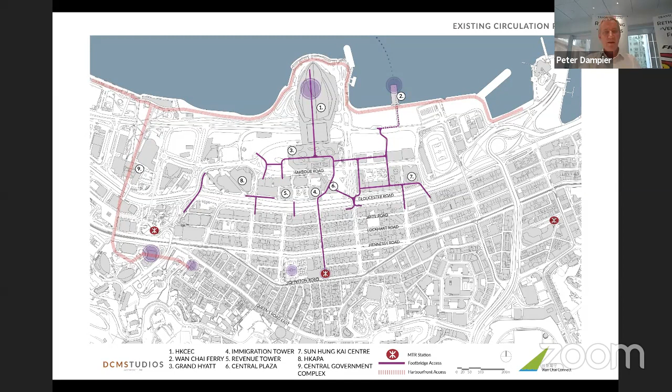No, you don't want that. That's the sort of approach at the moment. If you're trying to get from Wan Chai Ferry to Pacific Place, it's a bit of a nightmare. So the opportunity was the idea, by looking along Gloucester Road, of putting a platform across the top and linking them up.

But the real catalyst for this was the announcement from the government that they were going to sell the Immigration Tower, Wan Chai Tower and the Revenue Tower site. That's front and centre to the problem of Wan Chai.

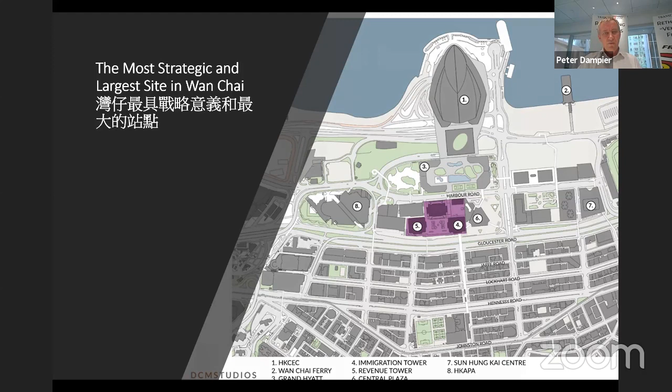Therefore we wanted to get in front of this development and spark some debate and give people something to think about, not unlike a similar thing we did with Site 3 with Benoy, which the government has taken on board, and that's going to be a design and price sale.

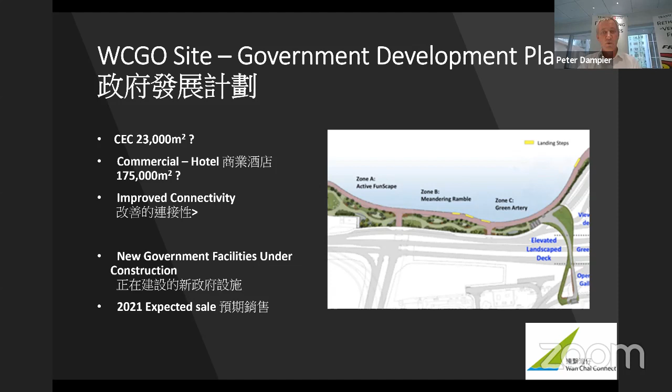So moving on, the government have basically intimated there'll be a new extension to the conference centre, a hotel, improved connectivity, but they haven't said what. They have actually mentioned recently about linking a bridge to the harbour, which is piecemeal because it only links the Hyatt Garden to the waterfront. It doesn't deal with the major problem, which is Gloucester Road.

Government policy is about livability, people-centric, better public spaces, walkability. So we felt we were on the right track. The real opportunity is the future of Wan Chai. It's very well known, Jan Gehl's statement about first life, then spaces, etc. Getting that right is in principle why we started this long before.

So actually it's looking at desire lines. It's an elevated approach that deals with the problem that, let's face it, they're not going to take the barriers down. You're not going to have pedestrianisation. They've been trying in Des Voeux Road for 17 years.

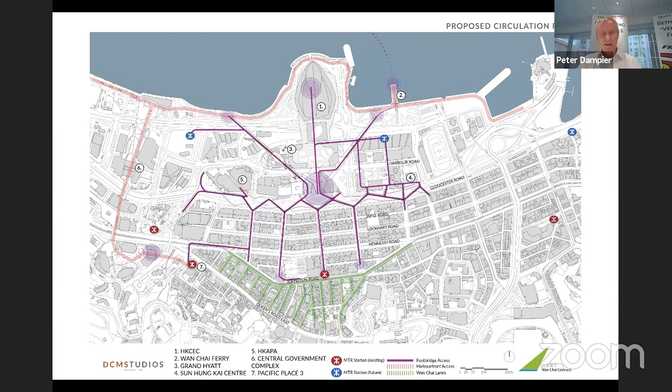So the only way to deal with this is to actually take it at face value and create something unique that floats above and provides that connectivity, linking the MTR stations, the new MTR stations, and the desire lines to the harbour.

So in essence, you've got 4 spikes coming back into Wan Chai to sort of Johnston Road. You've got a linear park floating above Gloucester Road, which isn't a thick concrete structure across the entire Gloucester Road with a dark, dingy thing underneath.

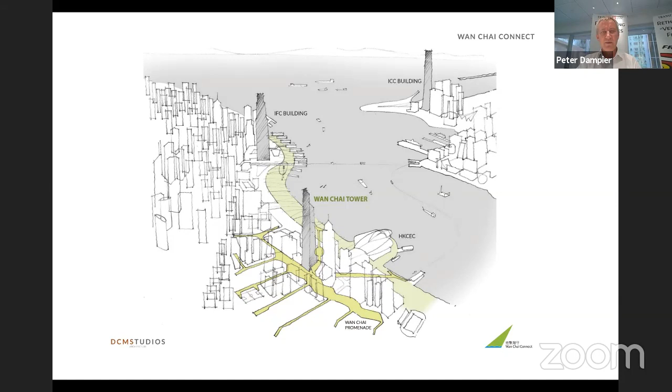It's been looked at in that approach to actually have probably only 60% of it covered, and then out to the harbour. But also, as part of that, a new tower and landmark in Wan Chai to actually triangulate it with IFC and ICC. So in effect, rejuvenating the area.

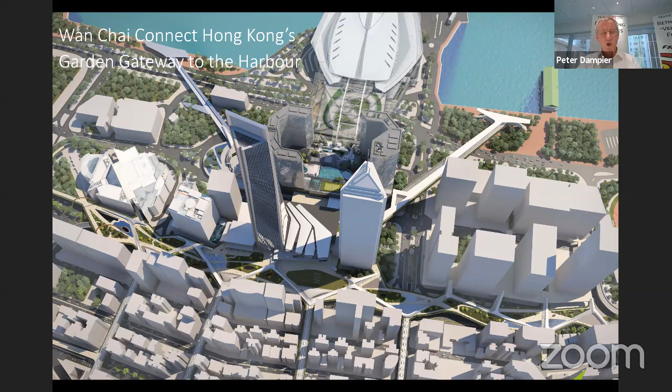So there's an aerial view of it, a garden gateway, the 2 links going out, a brand new entrance to the exhibition centre, which you go under, an amphitheatre on the top, so you've got a place that you can actually congregate and enjoy across there, and again, the legs going out through the Hyatt Garden.

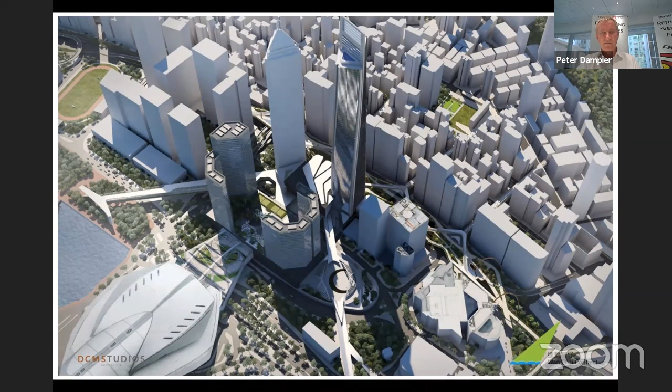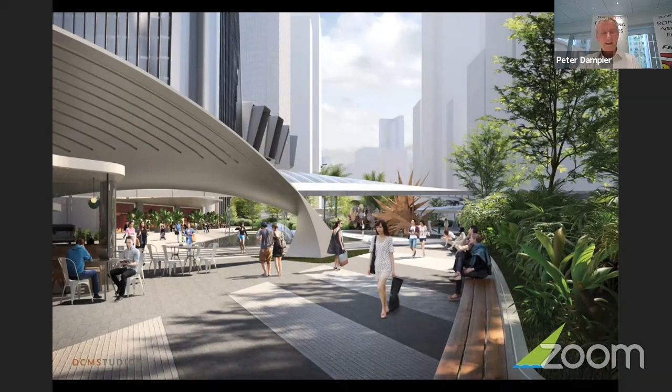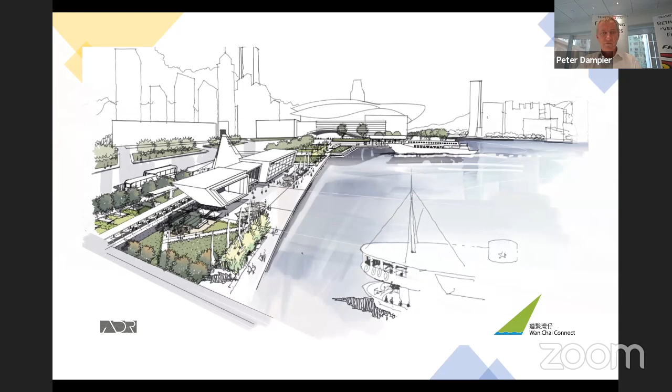A view which I know I've put this out on social media, so I'm sure many people have seen this, but creating something out of nothing, a linear park for citizens and tourists to enjoy alike. Vitality, cafe culture, landscaped bridges rather than the O'Brien - let's face it, it's a monstrosity in effect. And then a link there. There's potentially putting some F&B on the harbour. There's the bridge going back into the Wan Chai redevelopment, and then the brand new entrance with the amphitheatre.

Benefits, obviously, go through all of those, but we're looking at cultural, tourism, livability, health and well-being, social, environmental, society connection, environmentally friendly, health and well-being, the cost of value, the value of the site development, and we feel this is an opportunity for the government rather than private developers to actually do this at the outset, make the site more attractive, and they would recoup the cost of this through the increased premium on the sale of the site.

There you go. Sorry, I even ran over. I'm the first speaker, not a good mark. Okay, no, James, only a second.

Hello. Oren, can you hear us? Okay, let's see if we can find Oren. He's unmuted. Can you hear? Yes, we can hear you. Okay, is my screen shared? Okay, can you see my screen? Yes. Okay, good, so I'll try to stick to my time frame. I don't know, I'm hearing this echo. I hope everybody else can hear me fine.

So I want to talk briefly about the topic of improving MTR isochrones. And I think I need to start by explaining to those who don't know what isochrones are. So very simplistic - this is from an online app that looks at it in the context of public transport in different cities.

This is an example from Berlin. This is basically a map that shows, given a particular starting point, how far can you get in Berlin within 10 minutes, assuming a combination of mostly public transport, but also a bit of walking. As you can see in this case, when you start from a very well-connected node, which in this case is the Hauptbahnhof in Berlin, you can get to many places within 10 minutes. It's a bit less so if you're somewhere in the middle of the Tiergarten, away from any nearby transit stop. And so really the destinations you can get to are just around those station areas.

Related to this, we looked some time back at how does Hong Kong compare to other cities in terms of an overall journey that people take on public transport - how much of it is walking relative to riding, let's say the train, the MTR in the case of Hong Kong, or the bus. And we found, not very scientifically, comparing it to New York, Paris, and Mexico City...

The premise of this, I won't get into details, is the question of what is a walking experience and how does the level of service of walking, as related to space, to slopes, to weather conditions, reduces or increases the walking speed and therefore shrinks the isochrones.

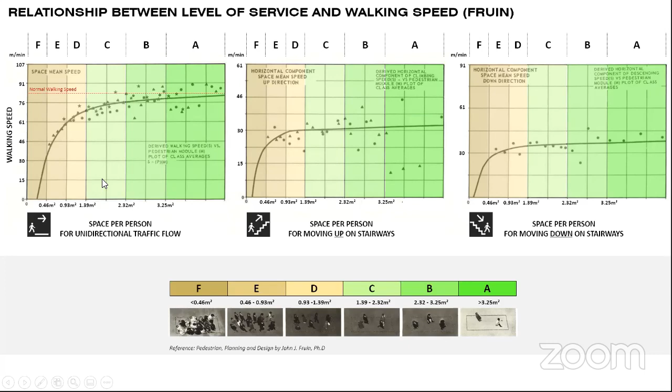Again, I'm sorry if I'm going fast on this, but hopefully some people are keeping up with me. We have our own metrics for level of service to do with weather protection, cross flows, amount of space available, obviously. I won't get into that in great detail, but what we did is...

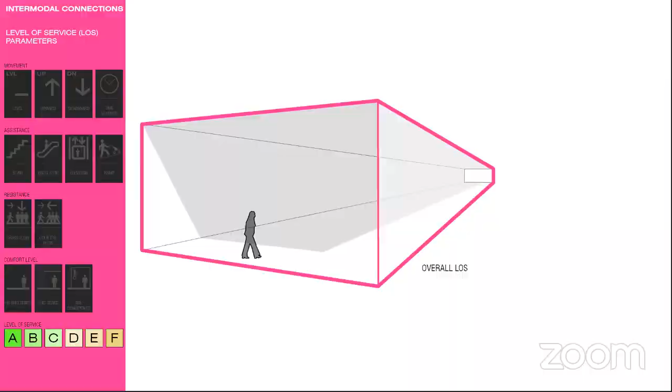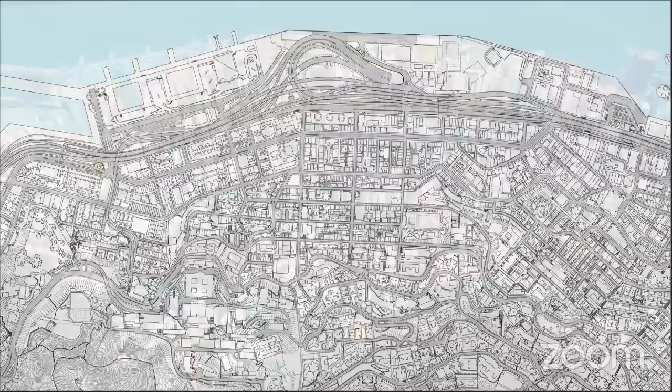I'm just going to skip to the findings. So we took a hypothetical case of Sai Ying Pun Station, and this is a bit of a post-rationalization to what obviously exists there, which is, as you will see, kind of more or less related to the escalator link along Centre Street.

But as a hypothetical exercise, if you look at Sai Ying Pun Station, which is here in the middle, and then you look at the MTR entrances to the station, and then you pick just one entrance, which is the one on 2nd Street, or maybe it's 1st Street. I think it's 1st Street.

The theory of access to public transport or to MTR stations or to metro stations is there is kind of a 6-minute walk catchment area. There are different variations to that. Some places use 300 meters and so on.

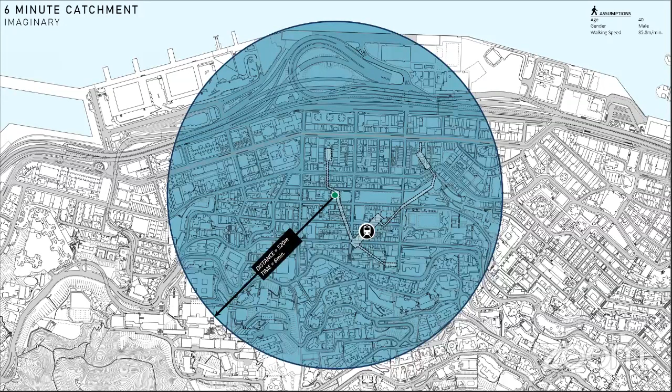But if you just take a radius of the hypothetical walking distance or 6-minute catchment in this particular case, you will get a perfect radius, which of course is not the case. So when you account for block structure, you get something that's much reduced because it's about the actual distance you can reach within 6 minutes, given the block structure.

Again, in this case, assuming that the streets are all equally accessible and you just walk at your regular speed, this is how far you can reach.

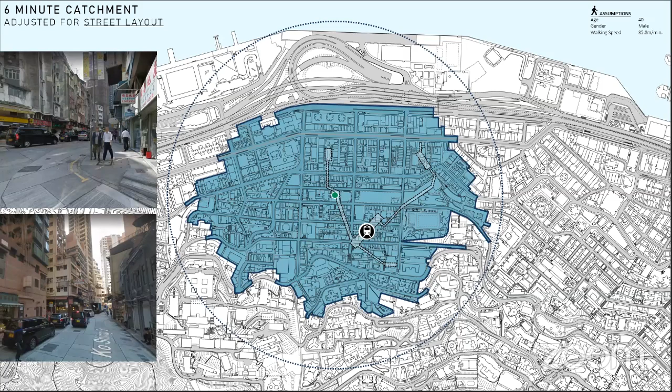Things shrink further when you start accounting for slopes. In the case of Hong Kong, of course, it's very important. So suddenly that isochrone, the 6-minute isochrone, shrinks further.

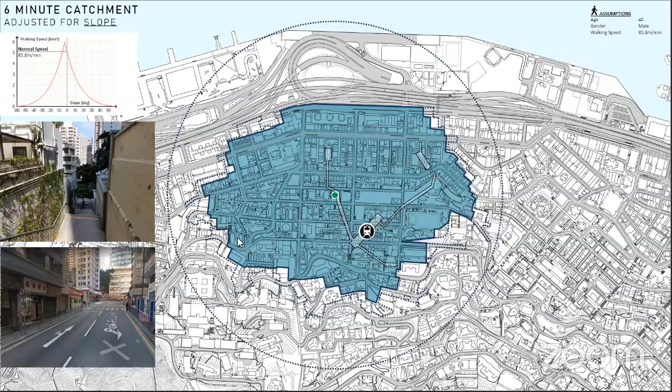And then if you look at street crossings, very important, because in Hong Kong, sometimes you have to cross very wide streets, with wait times for traffic lights to change and so on, the isochrone shrinks even further. Then you look at level of service on the street.

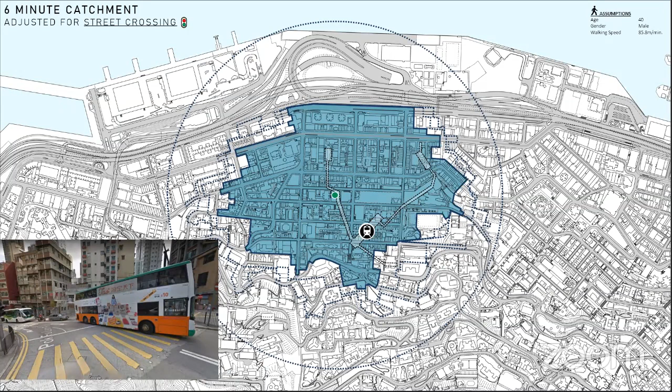In this case, strictly speaking, the amount of space available on the street. And again, if you consider that that means it slows you down, that your walking speed is reduced, the isochrone shrinks even further.

So where we end up, if you can see the dotted line, is where we started, or well, we started with the radius, and then increasingly our isochrone, our 6-minute isochrone of walking from the station, has shrunk.

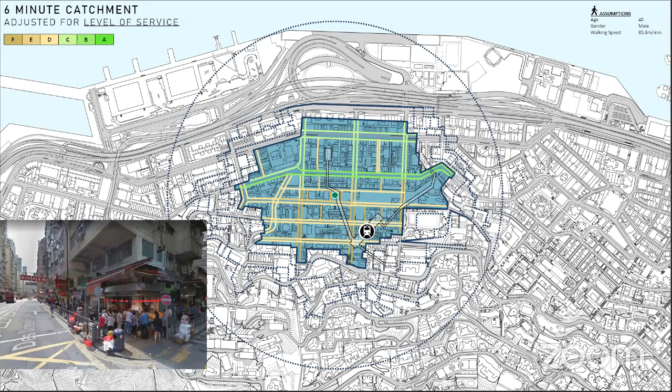Then you look at where you're trying to get to. And this is again an illustration of density. And the question is, okay, we want to increase the catchment area by extending the isochrone, the 6-minute isochrone, but where is my money best spent?

And in this case, you can see that the highest density of destinations, origin destination, is uphill. And so that kind of suggests to you where is best to spend your money in order to improve access to the station and therefore extend the isochrone.

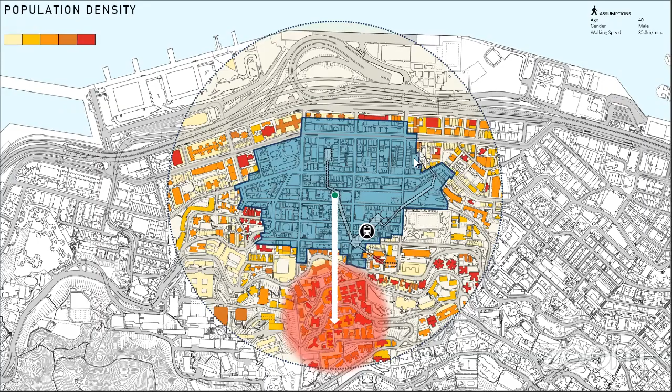You can look at different ways of doing it. And again, we know what ended up happening with this particular MTR station, which is a bit of a mix of tunnels to reach uphill and an escalator link.

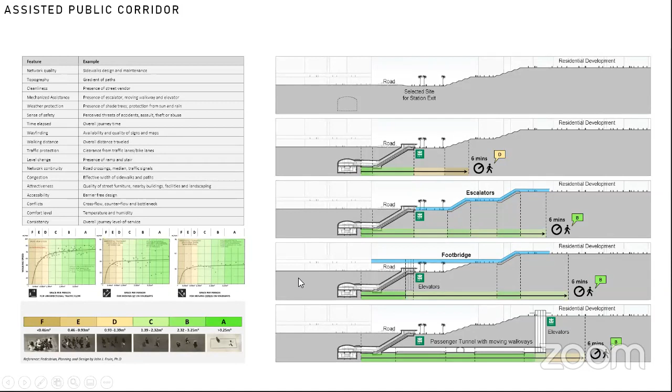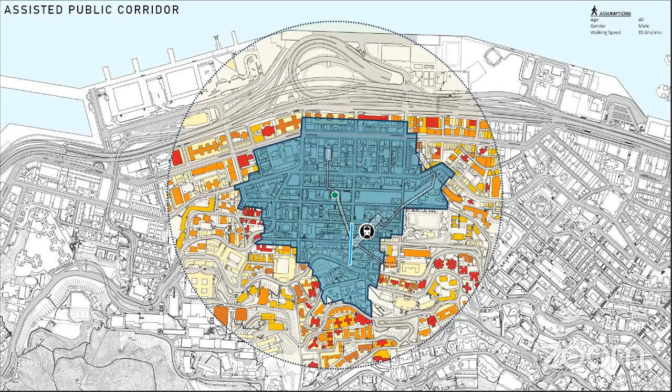And what you see is by building this escalator link, at least in theory, you added this little piece to the isochrone. So again, this is a bit of a study that's post-rationalization, but it goes to show how you can begin to prioritize investment in improvement in pedestrian infrastructure through improving the quality of the pedestrian experience in a way that increases the catchment of an MTR station in this particular case.

Thank you. I hope I didn't really overextend or go beyond my time too much.

Thank you, Oren. That's perfect timing. And I live in Sai Ying Pun, right in the middle of that isochrone you were just showing.

The extension or the base? Bonham Road. So just by... I was in it. I was in the circle and then not in the extended.

Okay, but it's interesting. We use that MTR station actually as a shortcut down to Sun Yat-sen Park because you can go then in the lifts and through the air conditioning and come out almost by the coast. So, do you add the MTR station itself and those long tunnels into your calculations?

That's right. But it's quite interesting because that MTR station, as well as the one at HKU, changed this whole approach of isochrones. In general, improving pedestrian connectivity is of course unrelated to the MTR, but it's interesting how the introduction of those two MTR stations changed the overall mapping of pedestrian connectivity in the area, because a lot of people use them as shortcuts.

Okay, so how visible, how manual is this process of doing the isochrones there? Are you using GIS or something like that, or do you have to go out on the street and walk up these slopes yourselves?

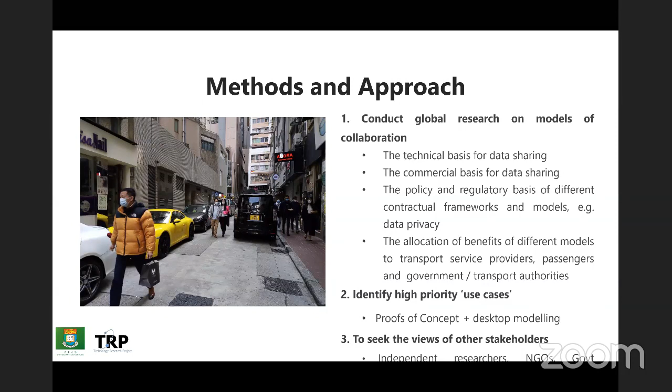It is a multi-stakeholder project, and we consulted, over what appears to be an 18-month preparatory period, around 80 stakeholders across all of those sectors. So we think we've covered every stakeholder involved in Hong Kong's transport environment.

The engagement, in short, the focus is on facilitating pilot projects. So whether we'll get time to deliver a whole portfolio of projects within the 7 months we have is rather doubtful, so what we're doing is actually prioritizing those. The focus has actually been on Exchange Square and the stakeholders around that. Exchange Square seems to embody many of the use cases we've identified in terms of safety, accessibility, intermodal transfer, and in many cases, lack of data and lack of awareness on really where to wait for your bus. It can be as simple as that in that case.

And what we do see is a lack of collaboration, which reflects the need to encourage that, at least between the transport operators and governments, and also the public to actually raise their knowledge of just what's available out there. The aim is to not just develop transport, but actually mobility as a whole.

Data sharing is one of those binding, enabling forces alongside regulation and user awareness and understanding and willingness. Data is a key enabler, and it supports both urban planning and road safety. In our case, we're looking to develop new insights from existing data by pooling data that exists generally in the public domain, such as static and dynamic data around transport and the movements of people. By analyzing that, we can focus on the potential to reduce costs, improve performance, and reuse data for purposes where it's never been used before.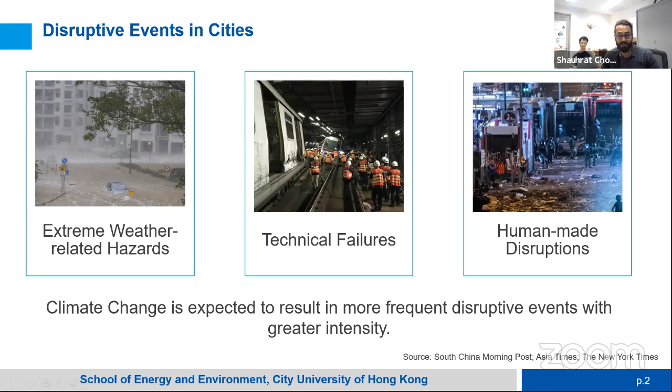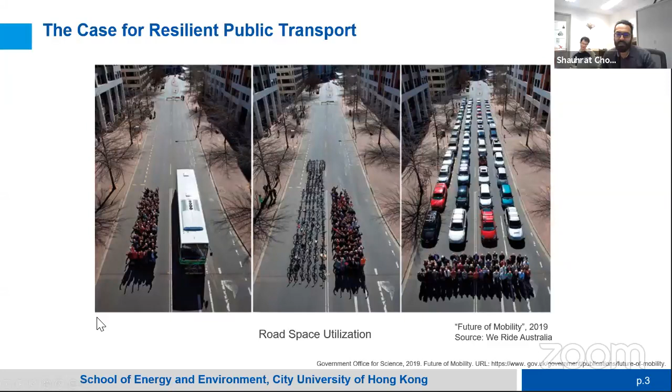So this is about unknown unknowns. The recent Future of Mobility report by We Ride Australia produced this graphic that highlights the impact of public transportation disruption on road congestion. A public transportation system that is not resilient will result in the displacement of passengers from more efficient modes to private vehicles, which will further reduce the ability of the transportation system to bounce back.

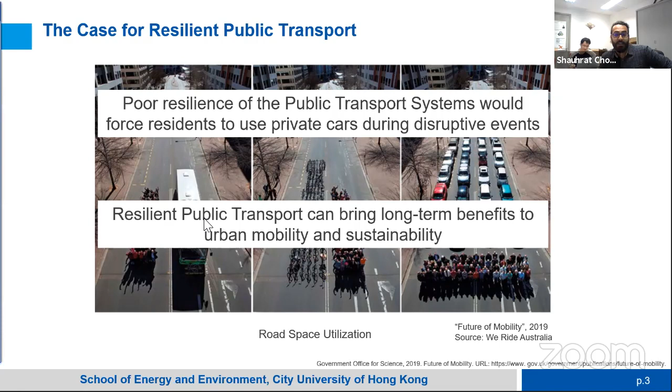In addition, resilient public transportation in cities can reduce the dependence of passengers on carbon-intensive private vehicles, and therefore contribute to long-term sustainability. So that is primarily the reason why we're looking at resilience in the context of sustainability and environmental impacts. In Hong Kong, in particular, the public transportation system is efficient in terms of ridership volume, but this high passenger dependency also makes the system more vulnerable to disruptions.

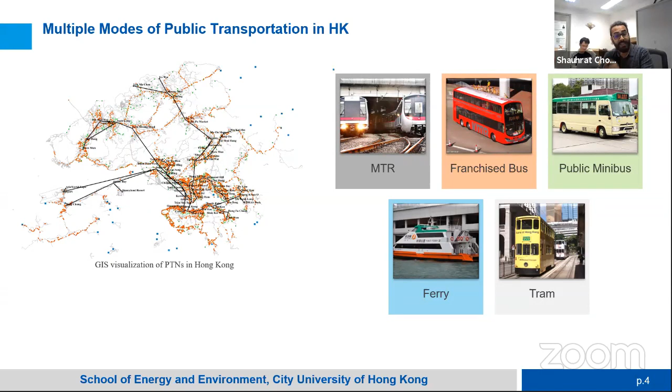For this reason, our project, which has been funded by UGC, focuses on producing data-driven resilience analytics in the context of Hong Kong. So there is a need to design and operate the public transportation system, keeping resilience in mind.

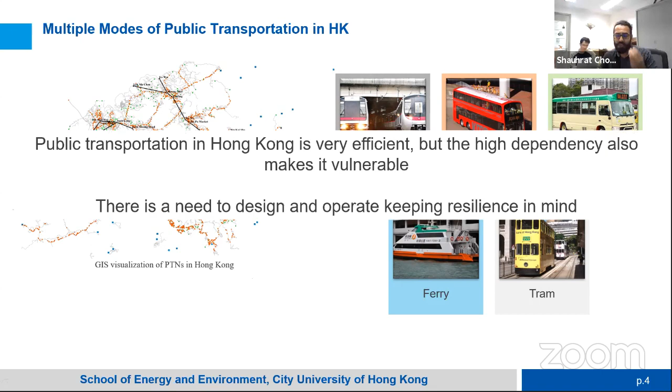So the natural question is, well, how do we define resilience? We use the definition that has been proposed by the National Academies of Sciences, which is also used by the US Department of Homeland Security. The definition goes like this: resilience is the ability to prepare and plan for, absorb, recover from, and more successfully adapt to adverse events.

The recovery phase aims at identifying optimal strategies to respond to the disruption. And lastly, the adaptation phase is focused on learning from previous phases to improve the preparedness of the system for the next cycle. So this framework presents a comprehensive view of resilience, unlike other frameworks in the past that only looked at either just one mode, or would only focus on one of these phases—either preparedness or recovery—and call it resilience. So what we're trying to do is a very comprehensive study here.

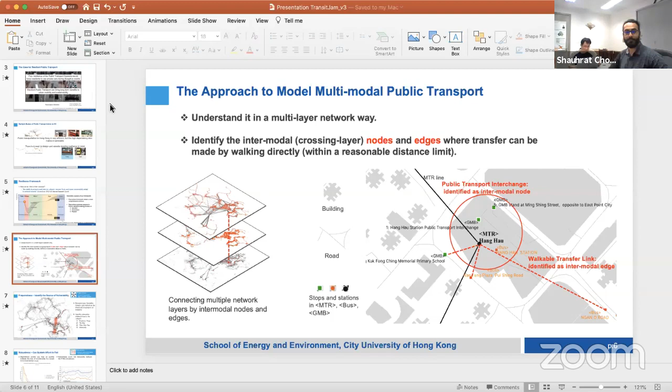So I will briefly introduce the modeling approach of multimodal public transport, and then show some of the use cases in our framework in different phases. So first, we model the transport systems as networks. For multiple modes, we understand them as a multi-layer network. And to connect different layers, we identify the intermodal nodes and edges.

For example, we have a map here near the Hang Hau MTR station, and the gray areas are buildings. This building integrates different transport services to be a public transport interchange, the PTI. So all nodes within the PTI can be combined into intermodal nodes. And there are also bus stops in the vicinity, which are accessible by several minutes' walking on the street. Here we can introduce the intermodal edges.

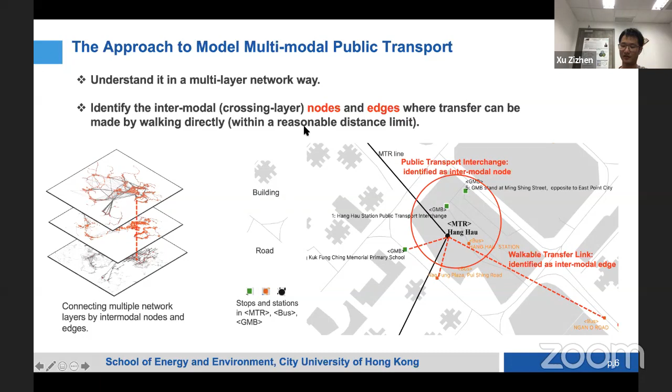And then for the utility of the framework, let me show some of the use cases. And for preparedness, we are actually finding the source of vulnerability in the network.

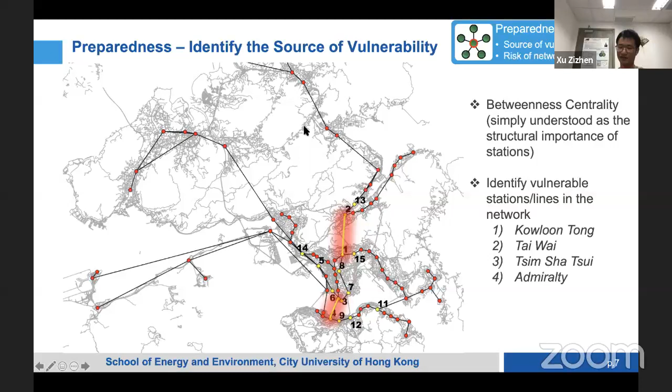Take a metro network as an example. Here we show one of our indicators for vulnerability, the betweenness centrality. You can simply understand it as the structural importance of the station to the entire network. We rank the stations by this metric to identify the top stations considered as sources of vulnerability in the network, and the transit lines between the stations are critical edges. Disruption on them has a significant impact on network functionality. This analysis is quite useful for planning.

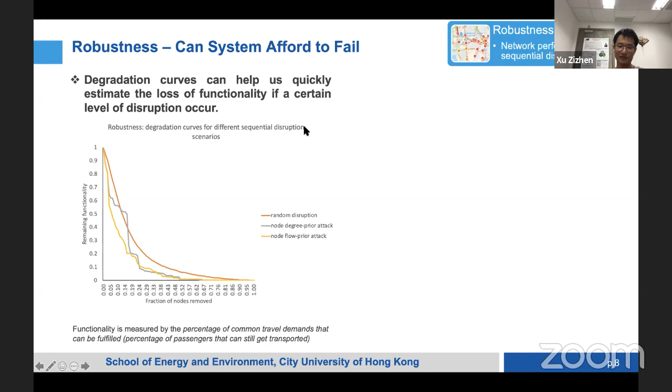Also, for robustness, we examine whether the system can afford to fail. Through simulations, we plot the degradation curves, and with them we can quickly know how much functionality will be lost at a certain level of disruption. For example, with about 10% of stations in disruption, we will lose more than 40% of passenger flows in the network.

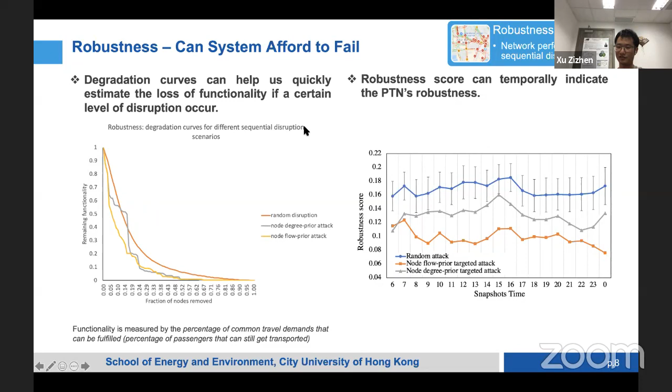Also, the curve can produce a score by integral. Then we can look into the temporal variation of the robustness scores at different times of day, which can be useful for operators to manage the spread of disruption.

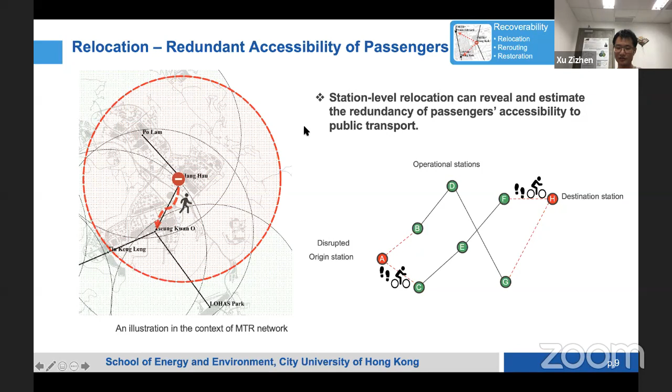For the recovery phase, here I introduce one of the scenarios, the relocation of passengers. Simply, what we mean by relocation is whether passengers can find an alternative transport near a disrupted station. It's good for people if there's redundant accessibility to transport service. Such relocation capability is quantified, and both commuters and operators can use the information to organize redundant routes during a disruption event.

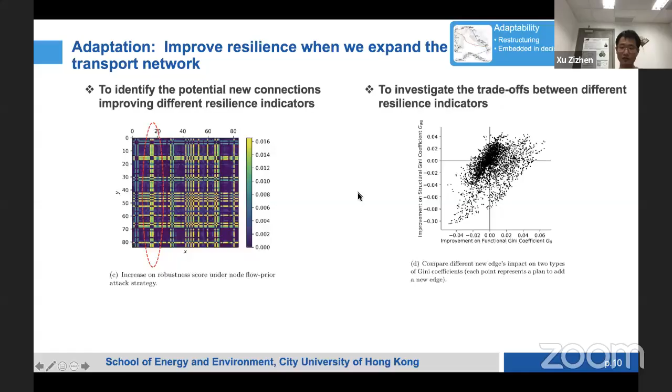I just wanted to end by saying that currently the data we're using to model our resilience analytics is the transport characteristic survey, which is quite outdated. So we really encourage data sharing between various operators for enhancing and actually utilizing the resilience analytics that we've been developing. Thank you for having us, and this is all from us.

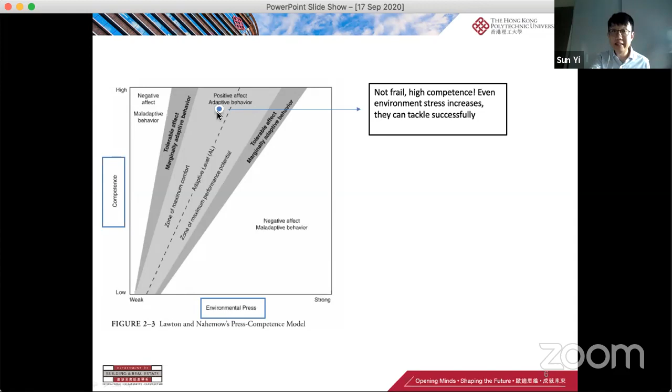When people are young, they are very energetic, they have full competence, and they live in a simple community, so the community can fulfill people's needs when they are young. When people get old, their competence may decline, so the same environment setting may not be able to satisfy the needs of people when they get old. So they come to this maladaptive range.

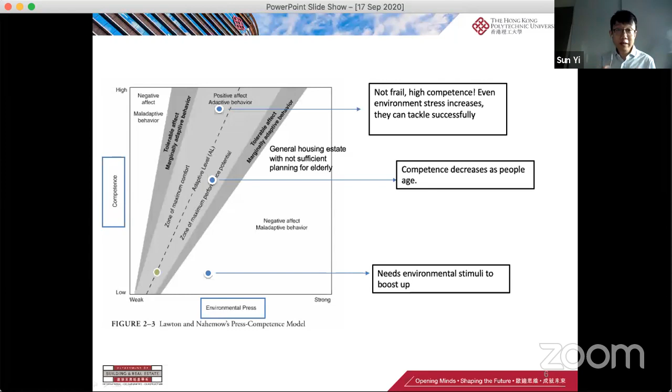So what planners should do, I think, is try ways to provide environmental stimuli so that for older people, we can recreate a person-environment fit. So this is the basic conceptual framework I have in designing this research.

When we talk about person-environment fit, we talk about good environmental characteristics and about people's own competence. Existing literature we reviewed suggests that place attachment is one of the very important personally-owned competencies.

Think about it: if people live in regional communities for more than 3 or 4 decades, they will be very familiar with where to get resources. They will psychologically have a strong feeling of embeddedness in that community.

And chances are that as people get older, they tend to continuously maintain their active interaction with the environment. So here I argue that apart from good environmental factors, place attachment and place satisfaction are some of the important people-oriented competencies that contribute to aging well, and to older people's health and well-being.

I will use a pilot study in Tsuen Wan, because it's a first-generation new town which is currently under a consequent trend of urban renewal. We do a mixed method research, including questionnaire research plus semi-structured interviews.

In the interest of time, I will highlight some of the important findings. First, we found built environment factors, including buildings, community facilities, and social environment, can predict place attachment. That means if buildings are well maintained, if there is a diversity of community facilities, or if the place is socially rich—able to provide sufficient open spaces for people to socialize and interact—these characteristics are conducive to the development of place attachment for older people.

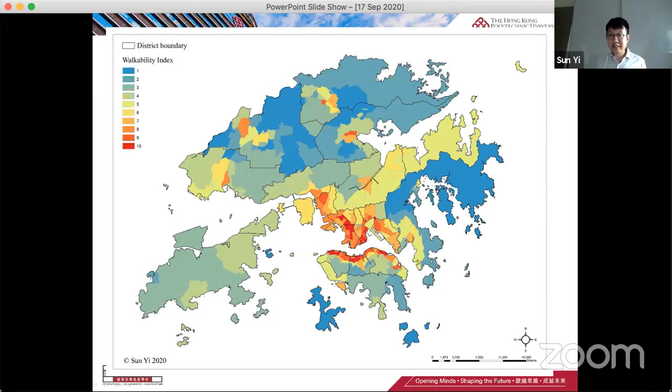Studies from the United States and European countries have demonstrated that this objectively measured walkability index can reflect the real behaviors of people when they walk in their own communities. So we hope to demonstrate whether or not this is a similar trend in Hong Kong, so that planners can simply use this walkability index as a walkability assessment tool for future urban renewal and new towns development.

As a conclusion, I think placemaking is very important. Equally important is people's lived experiences in cities. We're planning cities for people, so people's life and livelihood, people's well-being is very important. And planning is thus a matter of life and death. Thank you very much.

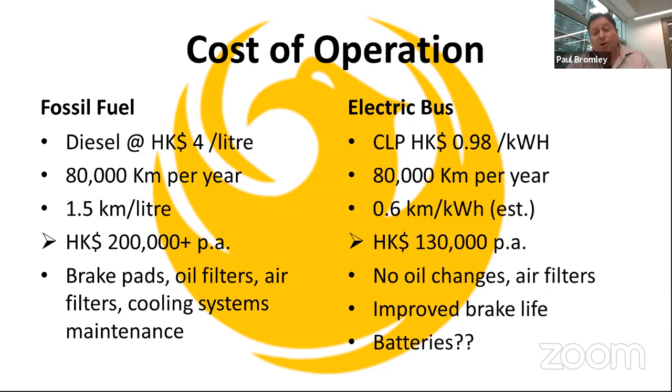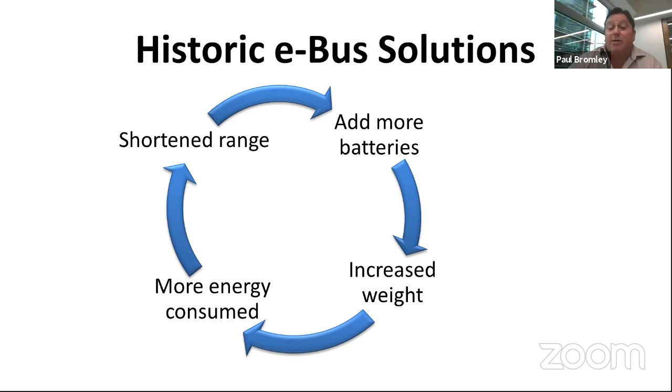Now, apart from cost, we talked about range. That's the next worry on vehicles. Historically, people have always had this range anxiety issue, so you get shortened range here in the top left corner. If you've got shortened range, how do I improve my range? I add more batteries. What does that do? That increases my weight, which uses more energy, and that's going to shorten my range again. So we get into this vicious cycle of high capital cost.

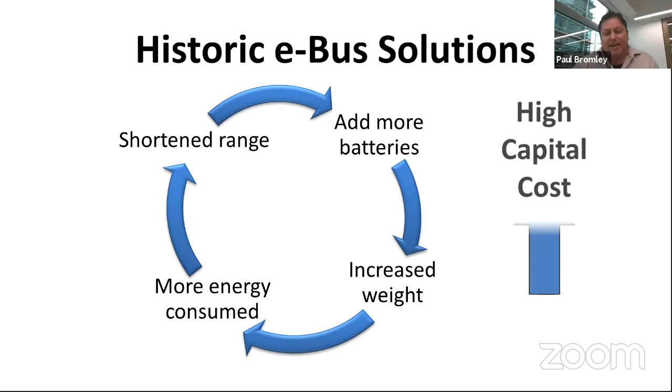This is historically where e-buses have been - put a lot of energy on board the vehicle to ensure we can run it the whole day. A typical diesel bus operation runs from 6 in the morning till 12 at night, then tops up with fuel and is ready for the next day. People have just kept that same sort of thinking with electric buses, so we need to address what's going wrong here.

So if we try to break that paradigm, starting in the bottom left corner: if we had less batteries, that means lighter weight. If we're lighter weight, we get a bigger range for the same energy, and that's going to reduce your energy consumption. So we get into a better circle this way - we're looking at reducing batteries, and this leads to a lower capital cost. I touched on cost earlier, but there's also the range to consider. That just leaves us with a big question: how to reduce the batteries?

So what are the technologies available? The world is moving on - there are technologies readily available today and being tried all around the world. For brevity, I'll focus on three or four technologies that can deliver this. First is what I call in-motion charging, using a catenary as an overhead charge. Second is hydrogen fuel cells, which you've all heard about. Third is we just stick with the battery electric vehicle model - there's opportunity charging, and then battery swapping.

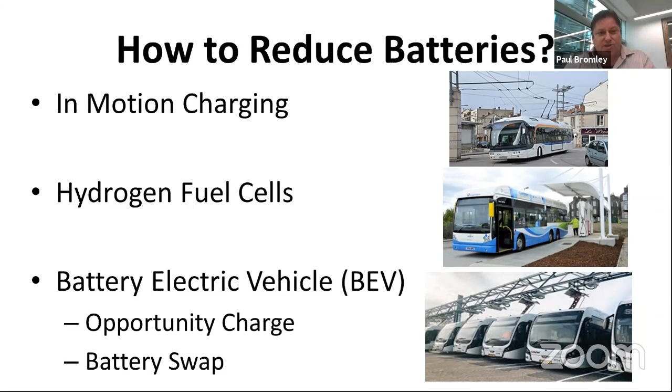In-motion charging is actually the modern trendy name for what we used to know as trolley buses. Any of you who've been to Vancouver will have seen trolley buses on the streets there. They have them in parts of Shanghai, typically going underneath the flyovers, using the underside for the electrical catenary. This is very similar to trams, but even better because it's more flexible. With today's modern technology, you can have a little bit of battery on board, so even if you had to go off the catenary, you can take a detour and come back on it fairly quickly. These are particularly suited for things like BRT, bus rapid transit, dedicated busways - which I know the Hong Kong government is not in favour of.

So the next solution is a hydrogen fuel cell. I've been in this business for over 30 years now, and hydrogen fuel cells are always the next best thing. But in reality, they are actually a very good solution, and the price of them is now coming down to a comparable level, where a hydrogen fuel cell is comparable to a diesel engine with all its emissions equipment.

The only thing is you have to supply the hydrogen to it. The output of these is you still have an exhaust pipe and there's still some smoke coming out, but it's actually just H2O. It's a very straightforward technology. Hydrogen has a very high energy density, which means with just a few gas tanks on the roof, you can drive for more than one day. And as I say, it fills up in 10 minutes, just like fossil fuels.

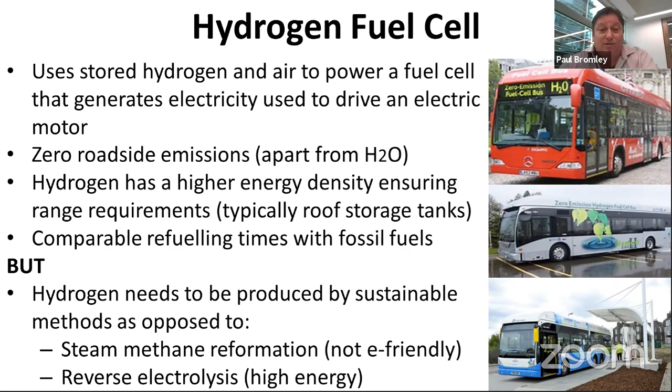Now, one of my favorite topics is rapid charging, or opportunity charging as it's called. There are two ways of doing this. You can either have it as an overhead pantograph, as in the picture in the bottom left corner, or you can have underfloor inductive charging, shown in the middle picture, which has some pads over the floor. There are receiver coils underneath the bus, and the charge is passed in the same way that you can now charge your mobile phone just by placing it on a plate. This enables you to charge the vehicles very rapidly.

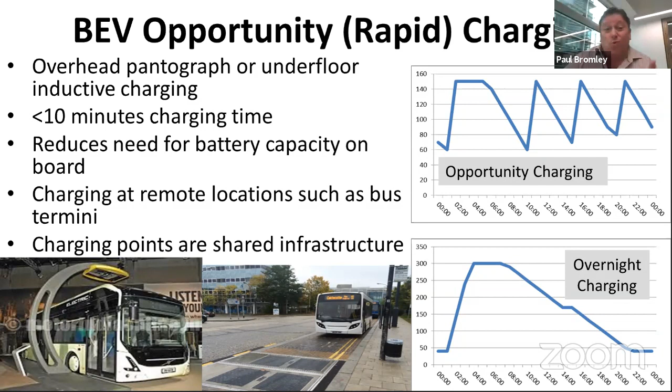What I've illustrated on the right-hand side of the slide is that with opportunity charging, you can charge 3, 4, 5 times a day, and you can reduce the amount of batteries you need. You don't need to have all of that capacity as required in the bottom graph, where you need a massive capacity just to run the whole day. So that's one good way of reducing batteries on a battery electric vehicle.

The other way is battery swapping, and this is a newish technique. It's been used in Beijing, and it's currently on trial in Hyderabad in India. Basically, you take a vehicle and have an automated battery swap system. There's no human intervention, so it should be totally friendly and won't have any accidents, since it's in a controlled environment.

A couple of the downsides are, as you can see from the graphics, it does take up a little bit of real estate, but it also leads us to breaking another paradigm in how we consider battery power, because the batteries change from one vehicle to the next. Basically, a vehicle gets a new battery, goes out, drives around, and a pack of typically around 20 batteries stays at the station, each gets charged up slowly, and then another bus comes along and takes that battery. So the batteries don't stay with the same bus all the time.

So it starts to get us thinking more and more about how the batteries are owned. How are we paying for diesel fuel? Who's putting in the infrastructure? This is really where we're going to break through on this, because everyone's worried about, if I buy a battery electric vehicle, what happens when the battery runs out? Do I have to pay a lot of money to replace it?

So we have to start thinking about models whereby there's third-party ownership of the charging solution. Whether that's installing a rapid charge station or a battery swap station, basically the operators pay on a power-by-the-hour basis, which is the buzzword for it. So you pay typically however many kilowatt hours of energy you've consumed, the same way that you pay so much for a litre of diesel fuel or petroleum spirit. So it starts to break down those paradigms.

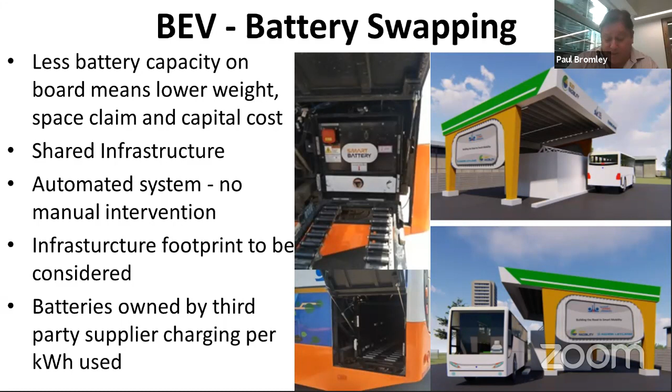I'm very conscious that I'm taking up a lot of time and we've been running late, so let me quickly summarize where we get with these paradigm shifts. The first thing I'd say is there's no single universal solution that meets every requirement, and it is very much horses for courses.

I talked about fuel cell buses. Fuel cells actually work quite well on commercial vehicles, but they do not work very well on passenger vehicles, for example. There is a scale to them, and in the same vein, it's necessary to consider the best possible solutions for the operational need.

Now, the battery charging or refueling infrastructure, as I just touched on, we need to think about that differently than today. If I had a petrol car and I went to the petrol station, I don't own the petrol station, I don't own the fuel pump, I buy the fuel by volume. So why don't we do that with battery charging similarly?

We take the risk away from the operator. So they don't own the battery, but they're paying by how many kilowatt hours they are consuming.

In vehicle operations, when we talk about different charging solutions, we get into the more technical aspects of where do we charge? I talk about rapid charging on buses, and the typical way of doing that is at bus termini, say Star Ferry Pier or wherever. That's quite easy, it won't obstruct anything.

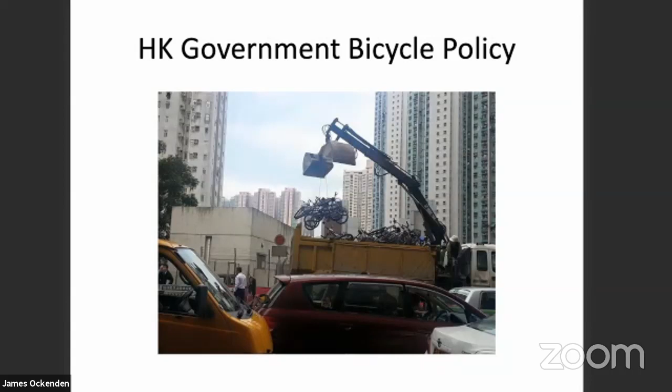A lot of this comes down to space. So the issues that we're discussing here today of how we make use of the limited urban space we have are used against cycling. There's a reaction that, oh, there isn't enough space for bikes. And sometimes that means people are envisaging hard infrastructure of segregated cycleways. Sometimes there's just a thought about the physical space of the bike itself. There's an underlying assumption there that somehow people who are getting around on bikes are an addition to the transport mix and not substituting for other modes, whether that's motor vehicles or public transport.

And then there are many other factors as well, such as the reduced number of journeys you need to make. If you're on a bike, you can stop off at this shop, the library, see a friend, all in one journey, and you don't have to go out at the weekend after your MTR journey home to go and buy whatever it was you have to from that other shop. So there are many ways in which cycling can take us forward in the transport sphere.

Okay. So the data that we have is very, very limited. Again, Transport Department are at the heart of this, and we don't know how many bikes there are. You know, the number of bikes in Hong Kong is an open question, and I get asked this, and I can't give a straight answer. Every 10 years, the Travel Characteristics Survey says how many households have bikes available, but the data is unreliable because it comes from a very broad household survey of people who rode a bike in the last 3 months. The annual studies by the Transport Department have no mention of cycling at all. The traffic census.

So today I would be talking about urban cycling infrastructure. I'll start off with the mindset behind planning of cycle infrastructure and run through some key interventions that we can do to our roads to make cycling safer and more attractive.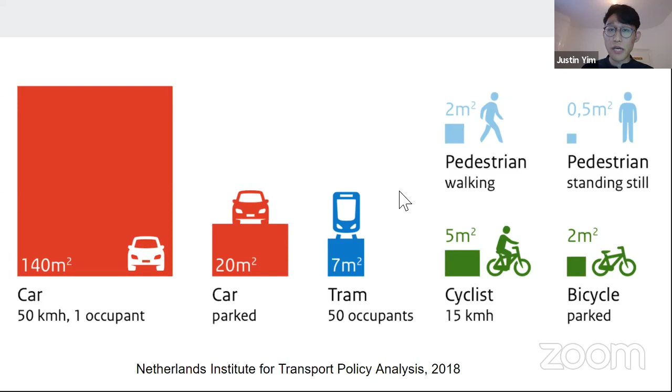In the UK, where I'm based now, there's been stepping up on cycling after years of realizing its immense socioeconomic and health benefits. The key mindset is that we should treat cycling truly like vehicles. They deserve direct and joined up routes. Points requiring cyclists to dismount should be avoided, and cycling infrastructure should be designed only by those who have experience on the road as cyclists.

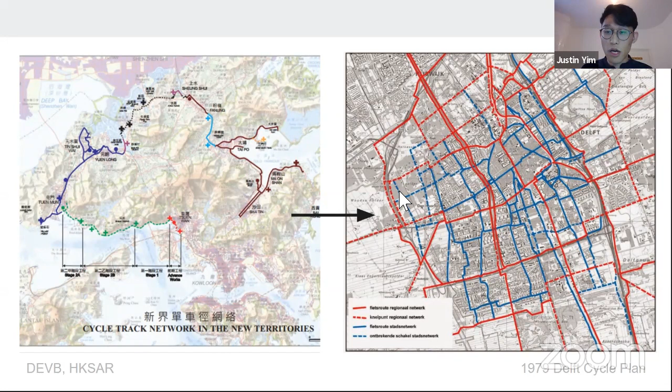It's the network, not just the links, that we should think about. A true interconnected network should have about 400 meters of safe cyclable links within every 1 square kilometer of street network. There are 5 core principles in designing a good, usable, attractive network for cycling. It should be coherent—cyclists should be able to start and end their journeys with a high quality route that is consistent and easy to navigate.

By safe, we're talking about a cycle network that not only improves actual safety, but also the feeling of how safe the environment is. Notably, on the direct column of this diagram, there's a 'don't' section about tracks requiring cyclists to give way on each side road. If the route requires a lot of stopping and starting, it will result in some cyclists choosing to ride on the main carriageway instead of a safer track, which is exactly what's happening in Hong Kong.

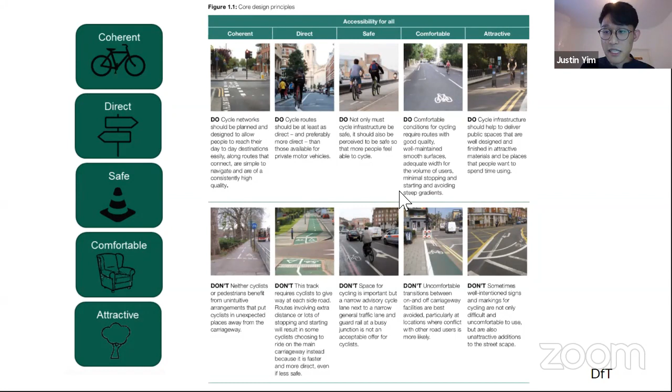The failure of providing safe cycling infrastructure has cost us the lives of 46 cyclists during the years 2013 to 2017. According to research, more than 80% of them died on the carriageway without physical separation. Urban cycling is unsafe in Hong Kong, mostly only because of lack of infrastructure.

And how do we make it safe? This hierarchy of control diagram originated from the field of occupational health and safety. It explains cycling safety approach in Hong Kong very well. We are stuck at the control of process, focusing merely on education and enforcement against cyclists in urban areas. We're not retrofitting urban roads to provide and improve cycling conditions using the engineering approach, which is above that and more effective. It's the engineering approach that we need most to truly protect cyclists.

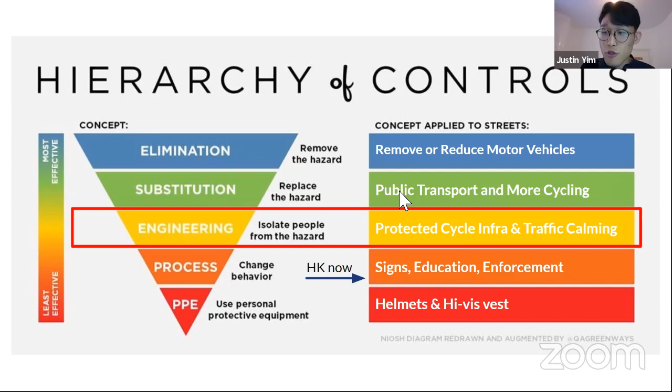In the UK, we have seen the completion of the first protected signalized junction in Manchester and the first Dutch-style roundabout in Cambridge. Both are designed to minimize conflicts between cyclists and vehicles at junctions, separating them mainly through the delineation of space.

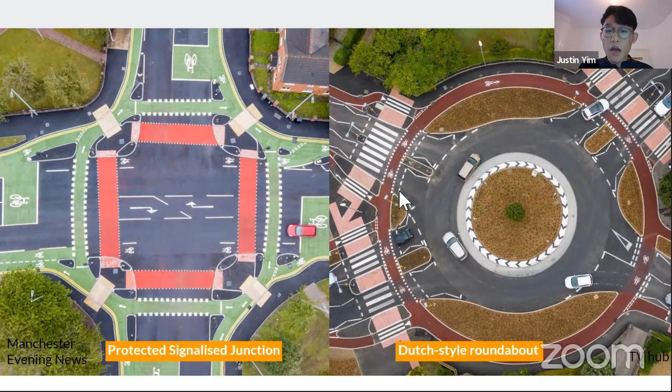But separation works not only with space, but also time. Here it shows an animation of an early release signal for cyclists in London. Cyclists are given a head start of about 4 seconds, which is proven to minimize collision risk at junctions, especially for those who are turning left.

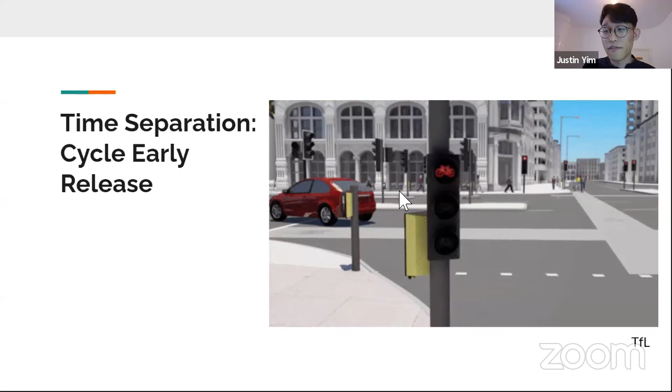However, certainly not all routes could be covered in the foreseeable future with major high quality segregated cycle lanes. So we should also try to provide relatively safe and cyclable connections between the major routes.

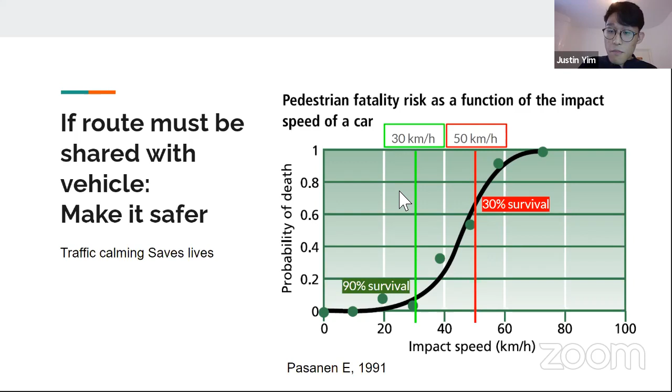According to WHO research, pedestrians are shown to have a 90% survival rate if struck by a car at 30 km/h. However, this chance of survival reduces to only about 30% when struck by a car at 50 kilometers per hour, which is the current default speed limit in urban and rural areas, even in Hong Kong. This fatality risk applies similarly to cyclists.

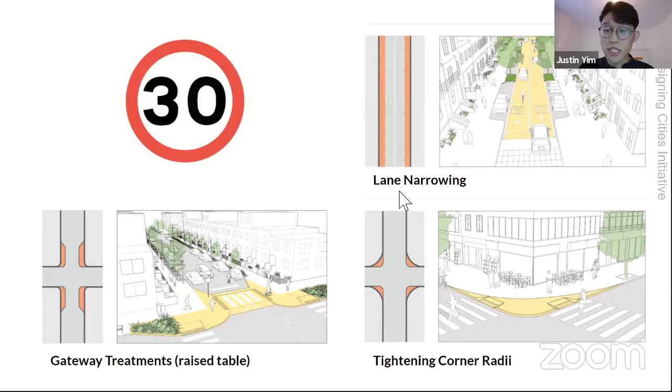Therefore, a 30 kilometer per hour speed limit should be set as the norm on urban streets. This will not only protect cyclists, but pedestrians even more. 42% of London's road network have now enacted this 30 kilometer per hour speed limit. A low speed environment could be achieved through changes to the road layout, such as narrowing the carriageway, adding speed tables, and tightening corner radii.

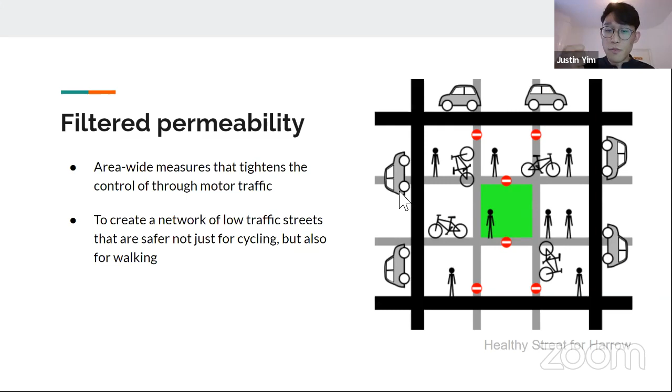But ultimately, we could also explore the concept of filtered permeability, on one hand to protect cyclists by providing a low traffic streets environment, but also to minimize the convenience of motor vehicles to truly make our streets human first rather than vehicle first. So the gist of it is to discourage through motor traffic.

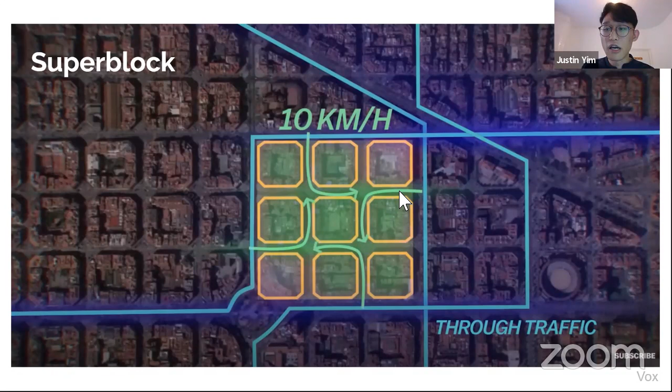Here it shows the Barcelona superblock model, which uses the same concept. It restricts through traffic just outside of this superblock and creates a low traffic, low speed road network for local access only for motor vehicles. You can see there's a 10 kilometers per hour speed limit, and routes are diverted so they can only do a U-turn, with mostly one-way streets in this network to minimize through traffic going through the area.

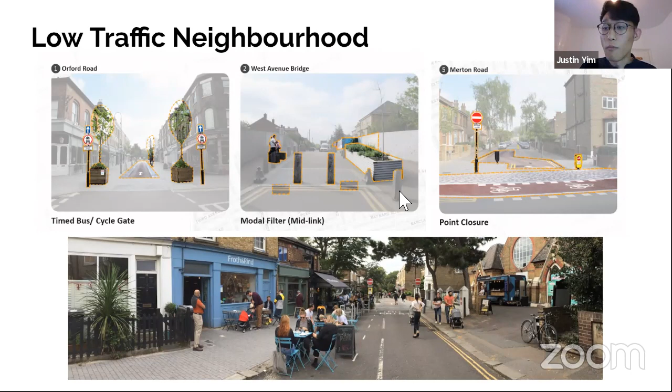This provides a safer environment and a place-making opportunity for people walking and cycling. This could be achieved by bus and cycle only roads with timed bus gates, and also modal filters that only allow non-motorized modes to go through within the main roads.

So after all, there will be more and more people uptaking cycling in the urban areas of Hong Kong with the completion of the cycle network in Kai Tak and West Kowloon, or even the Anderson Road ex-quarry site development in East Kowloon. It would be irresponsible as a Transport Authority to just dump these vulnerable road users onto the carriageway without providing any assistance in terms of infrastructure, as people cycling would, after all, want to start and end their journeys nearby.

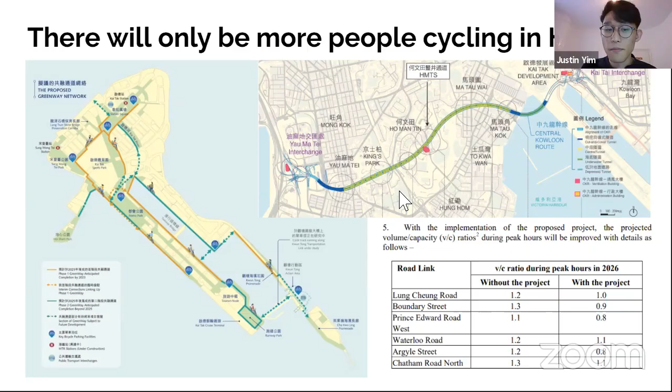And to the right-hand corner, we can see the Central Kowloon route. It's due to complete by 2025, although we don't know whether it will be extended. It will take a lot of traffic away from the surface streets. Perhaps that will be the time that we can demand, or prepare to demand, for high quality cycle infrastructure in Kowloon, or even across the urban area of Hong Kong. Thank you.